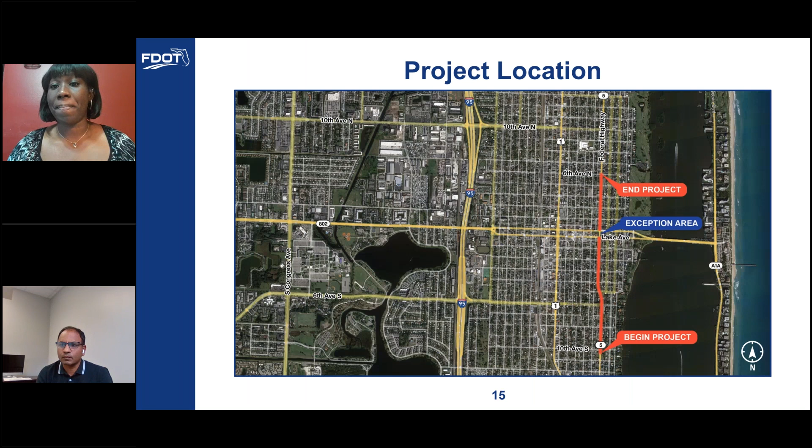Attendees are also welcome to submit any questions and comments using the platform's question panel at any time, and a member of the team will respond during our question and answer period. Next slide, please. Slide 14, we will have the project overview by Mr. Jagan Katkuri. Thank you, Justina. Slide 15.

The project is located in the City of Lake Worth Beach, Florida. Shown in red on the map are the project limits where the proposed improvements will be made on Federal Highway.

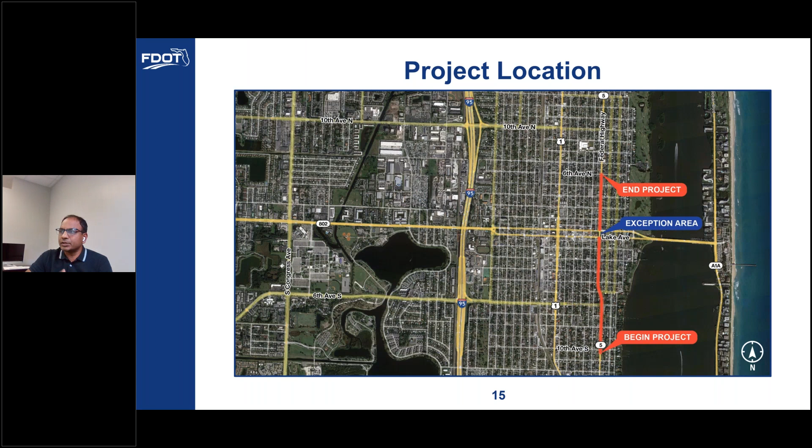Project scope: repaving the existing right-of-way roadway, installing pedestrian countdown signal features at signalized intersections, installing two mid-block crosswalks at 8th Avenue South and 3rd Avenue North, raising the intersection at 7th Avenue South, raising the crosswalk between 4th Avenue North and 5th Avenue North, reconstructing substandard sidewalk curb ramps, adding buffered bike lane from 2nd Avenue North to 6th Avenue North, upgrading lighting to better illuminate pedestrian crosswalks at 6th Avenue South, 2nd Avenue North, and existing and proposed mid-block crosswalks, and upgrading signing and pavement markings.

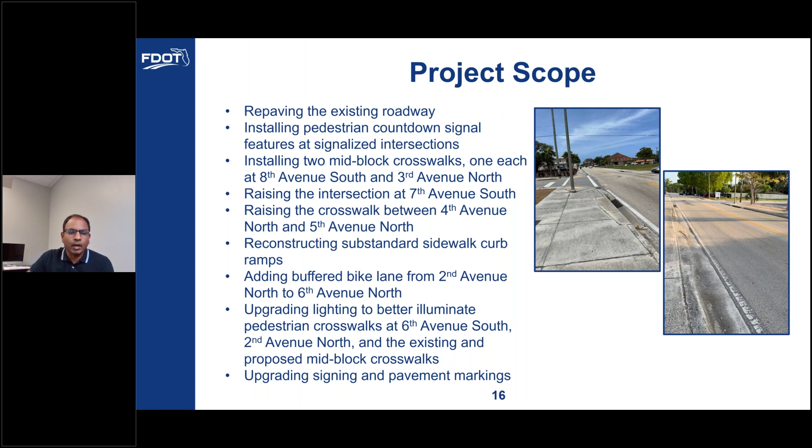The project is anticipated to begin in spring of 2024 and be completed by late 2025. It is estimated to cost 1.5 million dollars.

We will go over some of the details on the project. From the beginning of the project to Lake Avenue, existing lanes will be resurfaced and shared lane markings will be added for bicyclists to share the travel lanes.

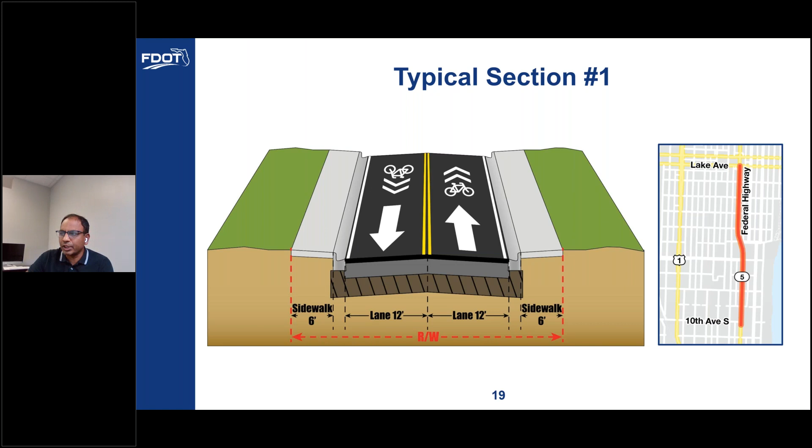From Lucerne Avenue to 2nd Avenue North, existing three lanes will be resurfaced and shared lane markings will be added to share the travel lanes.

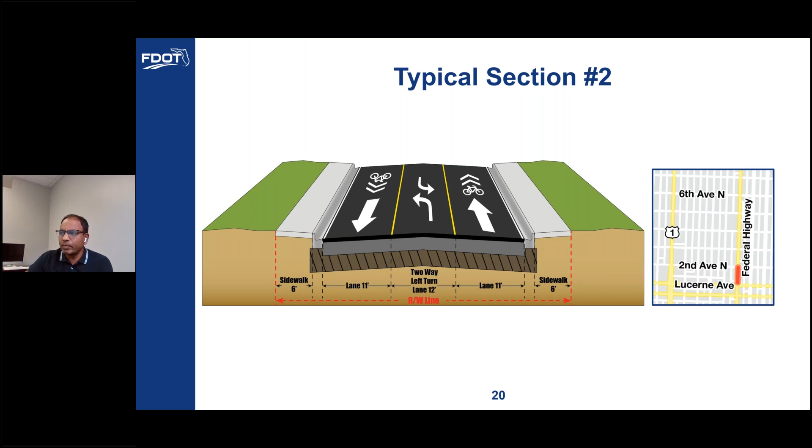From 2nd Avenue North to the end of the project, existing three lanes will be resurfaced and restriped to remove the center turn lane, and replaced with a six-foot buffered bike lane on both sides.

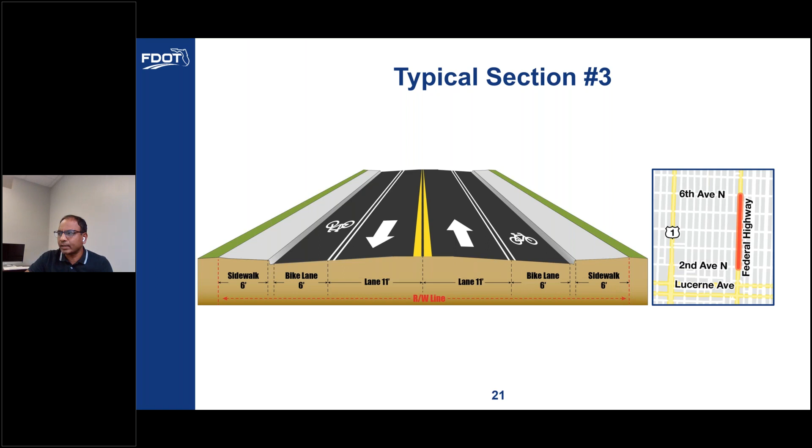In partnership with the City of Lake Worth Beach, the FDOT has prioritized solutions for speeding concerns within the project limits. In an effort to reduce travel speeds along this corridor, we are introducing a few speed management techniques that are appropriate for this corridor.

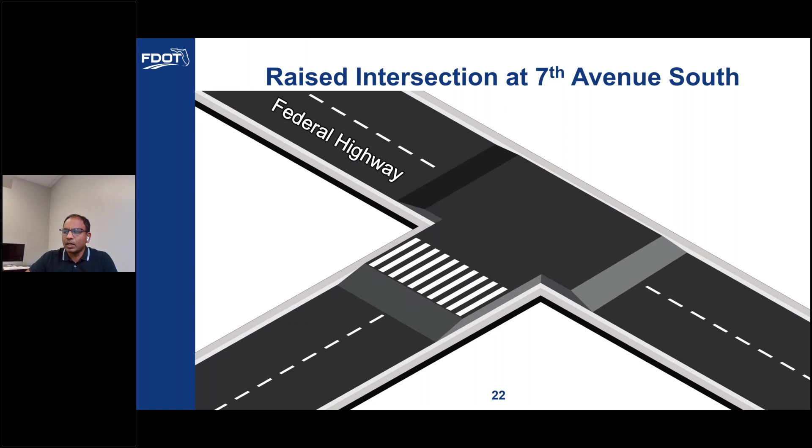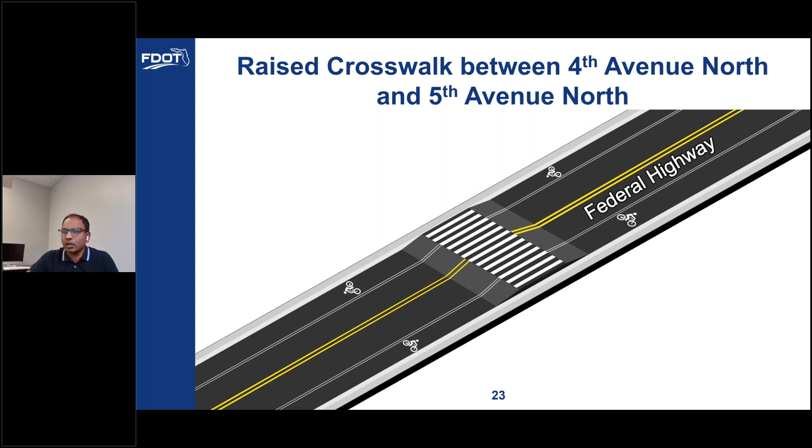We are also adding a raised crosswalk at the existing signalized pedestrian crossing between 4th Avenue North and 5th Avenue North.

Lighting and signalization improvements: upgrading lighting to better illuminate pedestrian crosswalks at 6th Avenue South, 2nd Avenue North, and existing and proposed mid-block crosswalks. We will be using the decorative light poles that exist along the corridor.

We will explain how we will address maintenance of traffic during construction. Daytime and nighttime work will be performed within the project limits. Flagging operations will be used to direct one lane of traffic at a time.

Temporary detours will be implemented during construction of the raised intersection and raised crosswalks. Access to businesses and residences will be maintained at all times.

Daytime work hours are 8 a.m. to 6 p.m. from 10th Avenue South to 2nd Avenue South and from 2nd Avenue North to 6th Avenue North, excluding the 2nd Avenue North signal. Nighttime work hours are 10 p.m. to 8 a.m. from 2nd Avenue South to 2nd Avenue North, including the 2nd Avenue North signal. In coordination with the city, the department has designated work hours in consideration of current ordinances and the surrounding community.

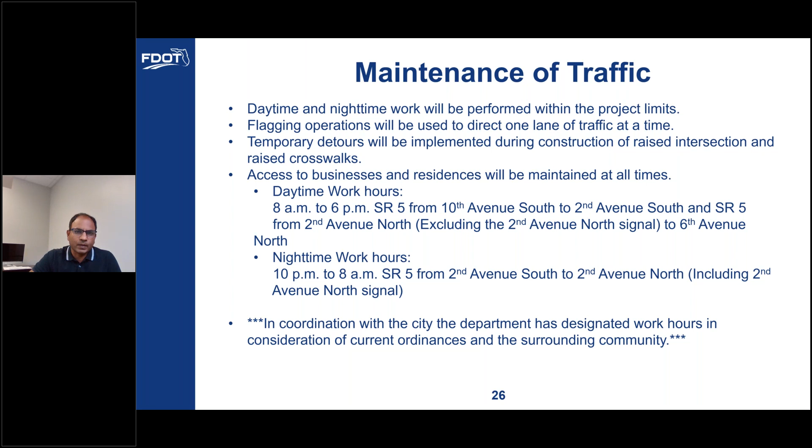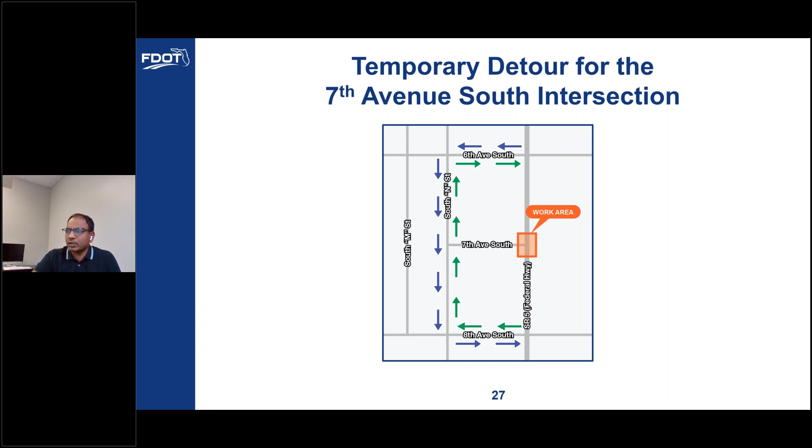During construction of the raised intersection at Federal Highway and 7th Avenue South, the contractor may use a temporary detour directing motorists traveling on Federal Highway to South End Street via 6th Avenue South and 8th Avenue South, as shown in the graphic. Temporary detour signage will be in place for motorists to safely navigate through the area. This detour will allow the contractor to construct these proposed improvements in a safe and timely manner.

During construction of the raised crosswalk on Federal Highway between 4th Avenue North and 5th Avenue North, the contractor may use a temporary detour directing motorists traveling northbound on Federal Highway to North M Street via 4th Avenue North and 5th Avenue North. Motorists traveling southbound on Federal Highway will be directed to North Ocean Breeze using 4th Avenue North and 5th Avenue North, as shown in the graphic here. This detour will allow the contractor to construct these proposed improvements in a safe and timely manner.

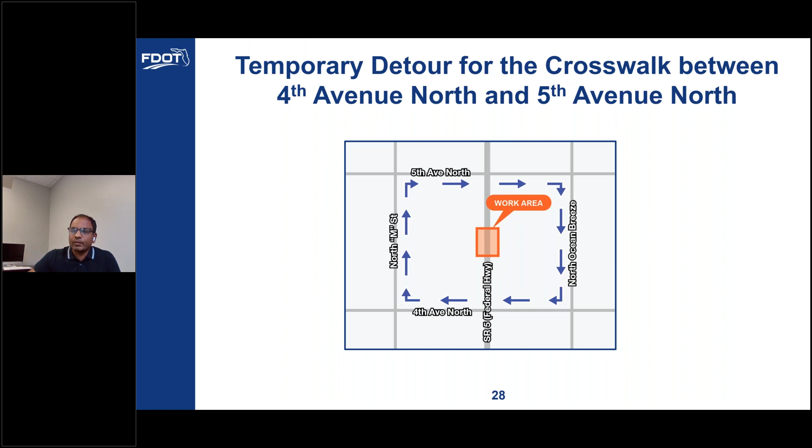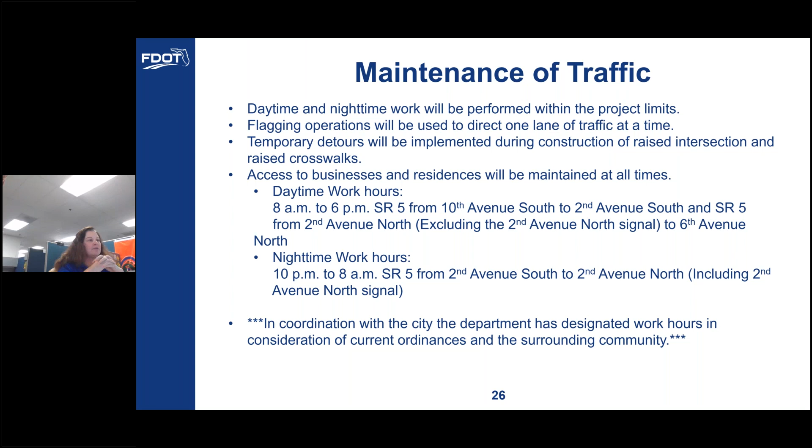In addition, there are two nominal detours that we have in order to install the raised crosswalk and the raised intersection. When those detours are in place, the project will have signage redirecting people around the detour. Of course, if you're local and you live in the area, you probably know all the top secret ways to get around the detour and may or may not use the same detour we've outlined.

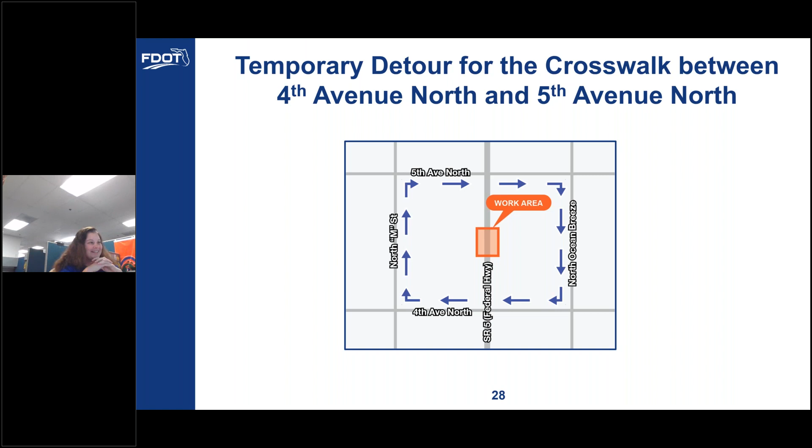Hopefully I was able to answer the maintenance of traffic question.

Thank you, Leslie. There was a question in regards to how long the project is going to take, from Ms. Tammy Panza. Thank you, Tammy, for your question. The project is expected to last between a year and a year and a half. We're not quite sure of the exact time frame yet, as that hasn't been determined, but it should be within that range. When the CEI and the contractor have that open house for beginning construction, they will have a finite timeframe on how long they expect it to take.

Thank you. Our next question is from Brittany. The question is, can you explain why the department is doing lighting? She references slide 24. Great question. So as you can see on the left side of the screen, the department has a Target Zero initiative to improve safety along the state highway system, and the initiative specifically includes addressing signalized crossings where pedestrians are crossing.

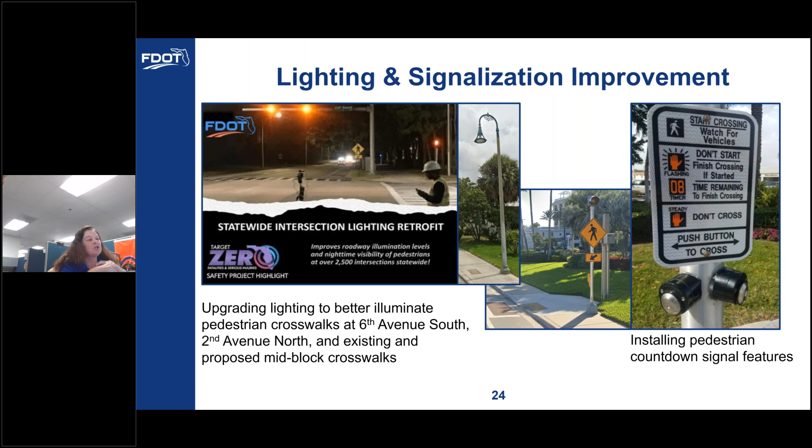So the lighting we are installing as part of this project is to enhance the lighting that's already there at those specific locations along the corridor. We have 6th Avenue South and 2nd Avenue North, both signalized locations, where we'll be enhancing the lighting with decorative features similar to what's out there today. The picture shown is one of two styles of decorative lighting along the corridor. In addition, we'll be enhancing the lighting at the two new proposed mid-block crossings, as well as the existing mid-block crossing.

So it's a statewide initiative to improve safety for pedestrians at signalized locations, which is why we're improving the lighting. Great question. Leslie, I just wanted to follow up on your reference to the decorative lighting - are you referring to existing lighting already on the corridor, and not proposed, right? So there is existing decorative lighting along the corridor, and the new lighting being proposed for this pedestrian initiative is also decorative lighting. Thank you for the clarification.

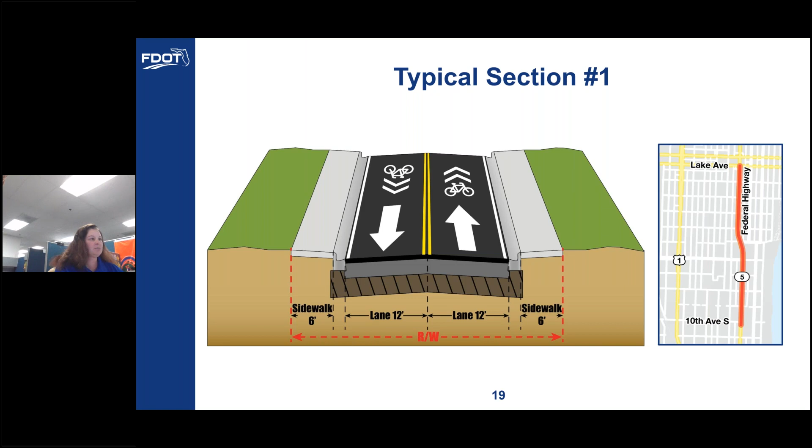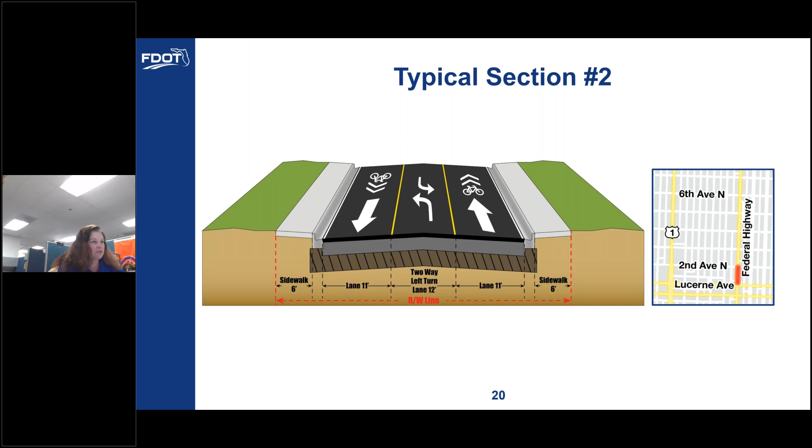Hopefully that answers your question, Brittany.

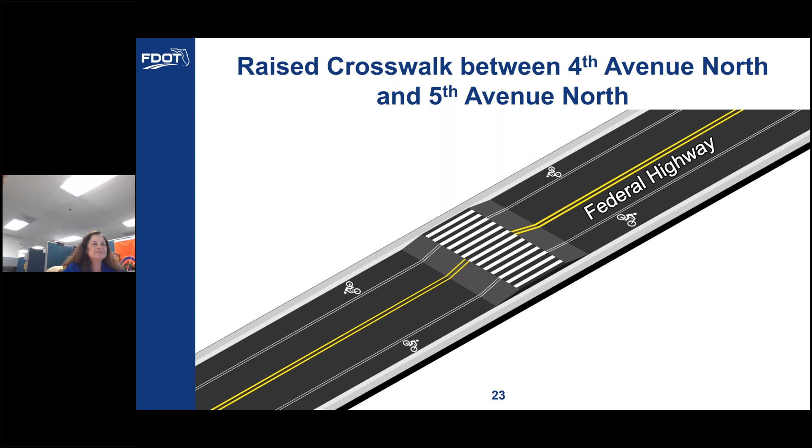I appreciate it, and I have one other question, which may be general and outside the scope of the project. Do the bike lanes past 10th Avenue North continue? Is there a plan for them to continue? If you put in the northern bike lanes, how far can they go in the future, and is that something you're able to determine?

The bike lanes are being added to that section due to the ability to remove the center turn lane. We did look at traffic numbers for the center turn lane — I see there's another question about that in the chat. We did look at traffic numbers to ensure removing that center turn lane would not create an operational issue. But Mr. Goldstein, to answer your question, the buffered bike lanes are able to exist there because we could remove the center turn lane and still had available pavement within the footprint of the right-of-way.

To the north, I don't know too much about what's going on since I'm not managing that project. But I believe the typical section to the north is fairly consistent with just 2 lanes in either direction for the most part. And because they have limited right-of-way, they may or may not be able to add bike lanes along that corridor. But that will be for that design team to determine what they can and can't do within the footprint of that corridor.